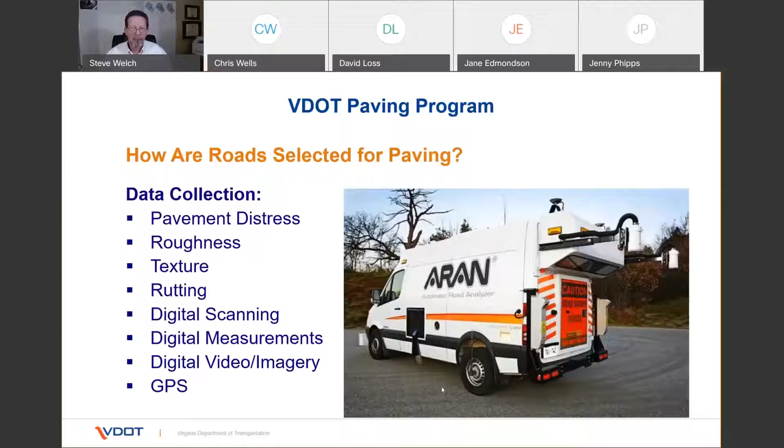Obviously, we have to address all the very poor ones first and the poor ones after that, and try to get to others beyond that as the budget allows. But we never let it get below 35 on interstates, and overall, we really won't let it get any farther than that.

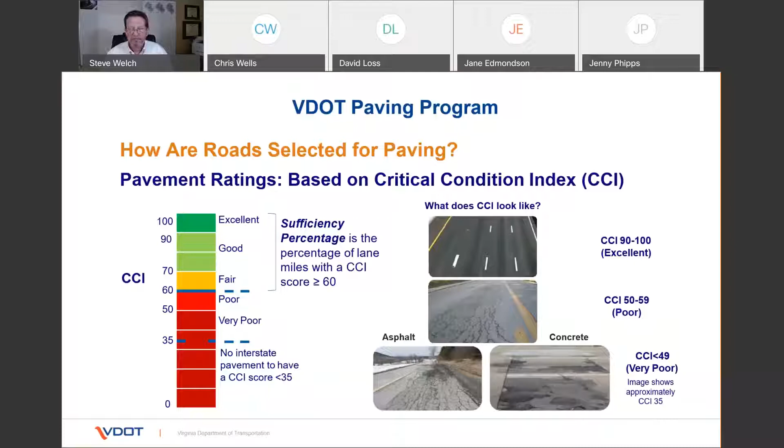So how often do we collect that data is another question we always get. We do this annually for the interstate and primaries. And beginning this year, we're going to be doing it annually for all the secondaries. Why is that important? In the past, we've only had the capacity, although still very good, to do 20% of the secondary roads every year. So in a 5-year period, we're gathering the data on 100% of the secondary roads, which consist of over 50% of all the roads in the county.

So another one is traffic volumes. We utilize traffic volumes to also figure out how to go about approaching which roadways are most important, in combination with the other things that we just talked about. So we also look at high volume interstate, primary and secondary routes with an AADT, or annual average daily traffic, greater than 3,500 vehicles.

And our goal is to make sure that 82% of that network, all the high volume interstate, primary and secondaries, maintain at least a CCI or rating index of greater than 60. And then we have low volume primary and low volume secondary roads that we set the goals of 75 and 60% for. And again, somewhat budget driven.

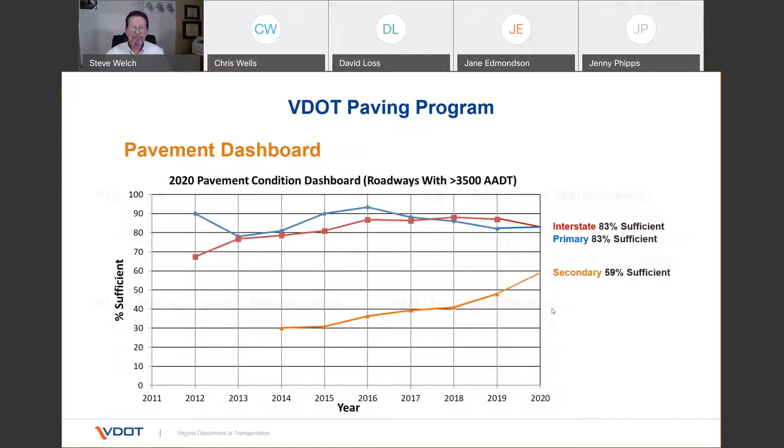So what types of pavement treatment do we do? We do have 3 types of preventative maintenance. One is slurry seal, albeit not the most popular, but as its name says, it's a sealant that's put on, and then it has a very fine stone that gets swept over top, that sticks to it, and it's brushed and sealed and brushed off to provide extension of the life of the pavement. We also do patching and crack seals as well.

But the main one that everybody sees is what we call plant mix or mill and overlay. So we mill a couple inches, sometimes up to 4, depending upon the condition, depth, other things. And then we overlay it and put back all the pavement markings and possibly sometimes change them, as Chris talked about earlier. And then on occasion, we do full depth reclamation or reconstruction, but that's only on rare occasions.

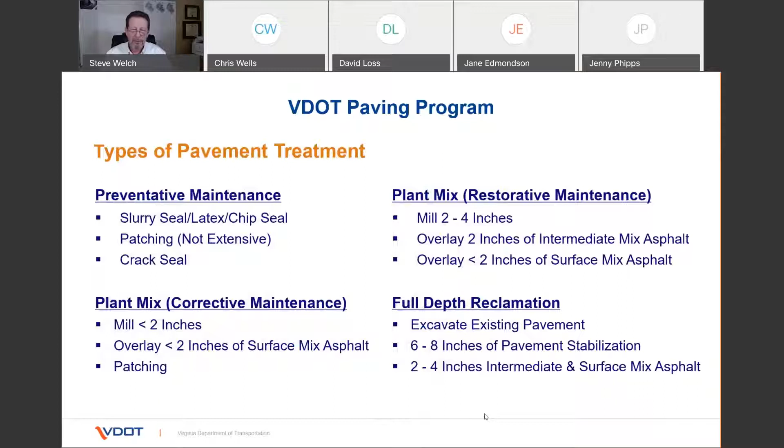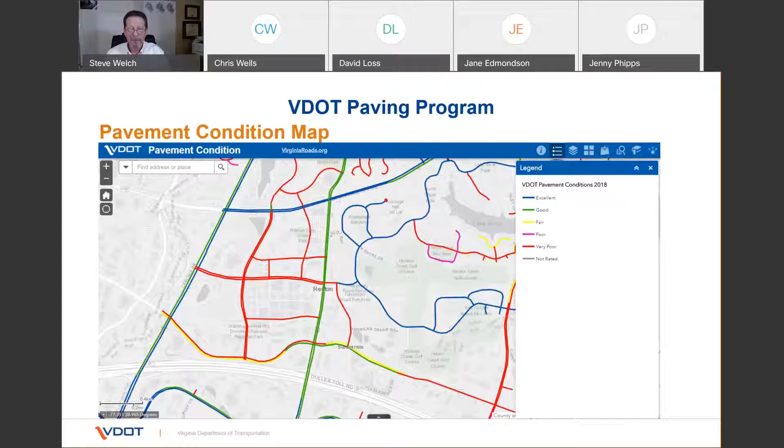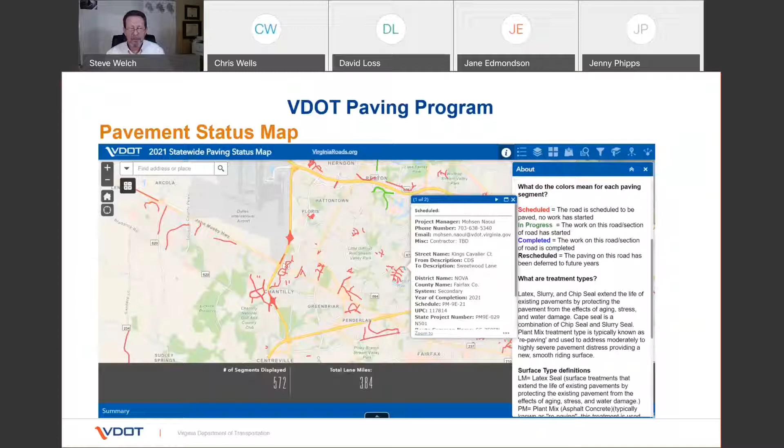And you can communicate with the project manager before the project gets started, when the project is occurring, and even after the project, if you have questions about your road that's getting repaved in some way or fashion. And again, that's an interactive map. You can zoom in, zoom out, go to different places, but it is an entire statewide map.

So each year when we develop our pavement plan, part of the work that we do, of course, is to eradicate the pavement markings off the roadway first. We put down sometimes some spray temporary markings, especially if it's a big project. And then our goal is generally to replace in kind with our contractors, but we do some adjustments where we might improve a crosswalk because it maybe wasn't lined up well, or add edge lines, or make some other improvements that we work out with the contractor during that off season of the wintertime as we're getting ready for the season.

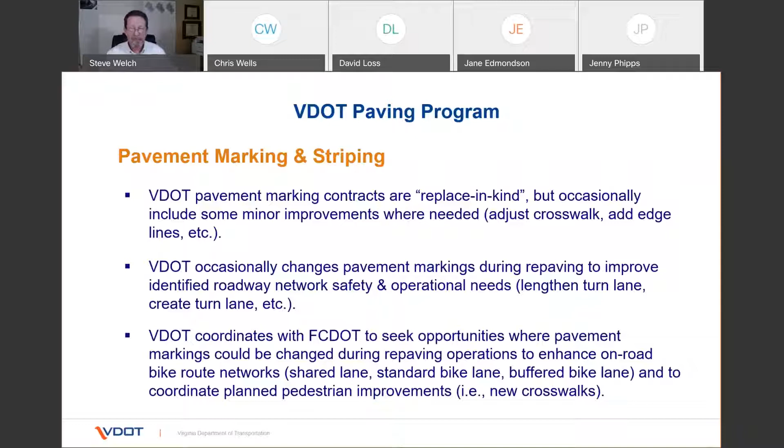And then lastly, in the last bullet, as Chris talked about and we'll be talking about here further, we work with Fairfax County together. The county has the comp plan for bike ped that Chris will talk about, and we work with them to figure out if there are locations where we can do shared lanes or standard bike lanes or buffered bike lanes and other pedestrian improvements. And then we'll adjust our contracts accordingly to marry up with what the county is looking to do as part of their bike ped program. So that's just kind of the big picture of it.

So if you ever have a question, you can call the number on the screen, 1-800-FOR-ROAD. Easier yet, you can go onto my.vdot.virginia.gov. A palette will come up where you can put a little information and your question in, and we have a ticketing system that captures it and sends it to the right person. It can really be about anything, but in particular, we're talking about the pavement tonight. Also, both the Pavement Condition Map and the 2021 Paving Map are now available on the virginiaroads.org website.

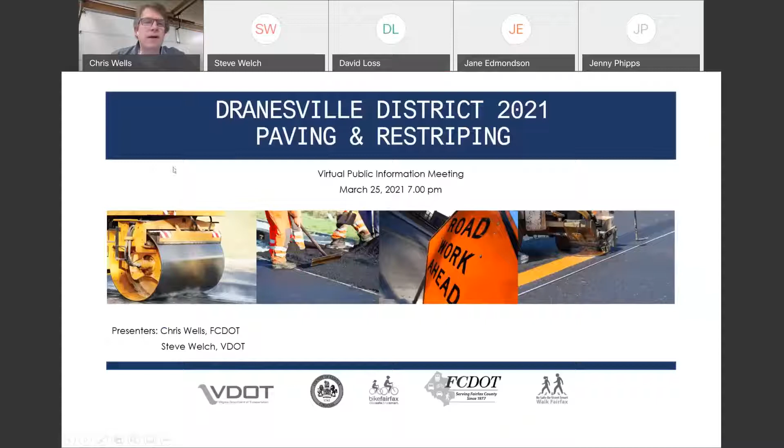There we go. Okay, so again, I'm from Fairfax County, Steve is from VDOT, and we work together on this. And what is our role at the county? Well, our role is to implement county policies and to work directly on behalf of the residents of the county. So as I explained, we look at the roads that are being paved, see if there are any roads that are excessively wide, whether it's a wide 2-lane road that could just have bike lanes, or a 4-lane road that doesn't really need to be a 4-lane road because it's carrying a lot less traffic than anticipated, and we can make those a 2-lane road.

So in Dranesville, we've been doing this for a few years, so there's actually not a lot of restriping proposals this year, but let me give you a little bit of the background. As I said at the beginning, the idea is to really improve the community, of course, by building a bicycle network, but also to give us those added benefits of reduction of excessive speeding, better organization to the striping if you have parallel parking, things like that. We originally started just focusing on the bicycle network. Our county has a bicycle master plan, but we soon realized that there was a holistic approach that really had other benefits.

The county's been doing this with VDOT for many years, so in some parts of the county, we're actually really starting to see a lot of connectivity of different networks. So when you combine our trails with these on-road bike facilities, you really are starting to see the benefits of a network. In these past 6 years, we've been able to do a couple hundred miles of bike lanes through this process. The most important thing, though, to me, and maybe to you as a taxpayer, is that this is about the most cost-effective thing we do.

My typical responsibility at the county is working in our capital project section, where we work to identify and fund and build trails and sidewalks. And the cost of those has really gone up over the 18 years that I've been doing this.

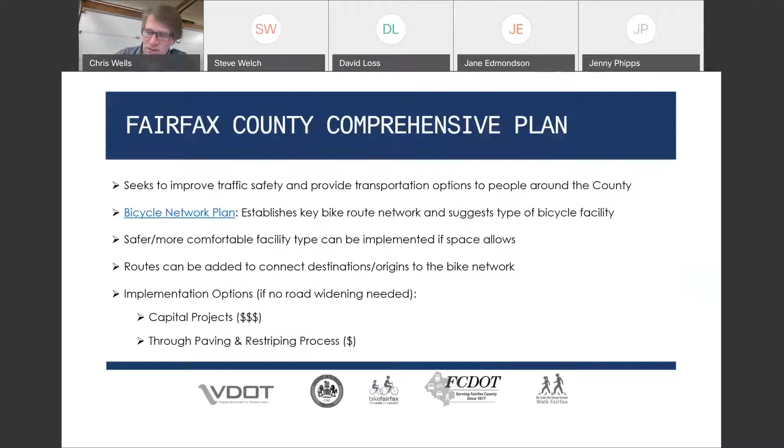They're in this paving business year round, and we have a very tight window between the fall and now, where we identify these roads, we meet with the board members, we're meeting with the public at this time, and these paving guys are coming in a month or two, and VDOT has to develop these striping plans and get everybody in line, and make sure everybody knows what's going on. So VDOT really does deserve a huge shout out for helping us with making our communities better.

So why are we interested in bicycling? Well, we know that there's been a focus on bicycles in the United States for 40 years or so that hasn't really worked, whereas other parts of the world focus more on off-road facilities. In the United States, we were typically just focusing on the type A cyclist, the bicycle commuter, who felt comfortable riding in traffic and riding with cars.

And so what you've seen for these past few decades in the Dranesville district on roads like Dranesville Road, for instance, we've been able to build roads and add roads where we have bicycle facilities on 4-lane divided roads. But a 4-lane divided road where cars are going 45, 50 miles an hour is not the place that I would feel comfortable riding, and certainly not the place that a family with children would feel comfortable riding.

So in America in the past few years, it's actually been a dynamic time of transition in bicycle best practices, where we realize we really need to build more off-road facilities along our major roads, but we still want to have these paving facilities that we're talking about tonight, because they're typically in quieter residential neighborhoods. They've got the space, they have these additional benefits, and they actually are comfortable and safe to ride. So again, it all forms a network.

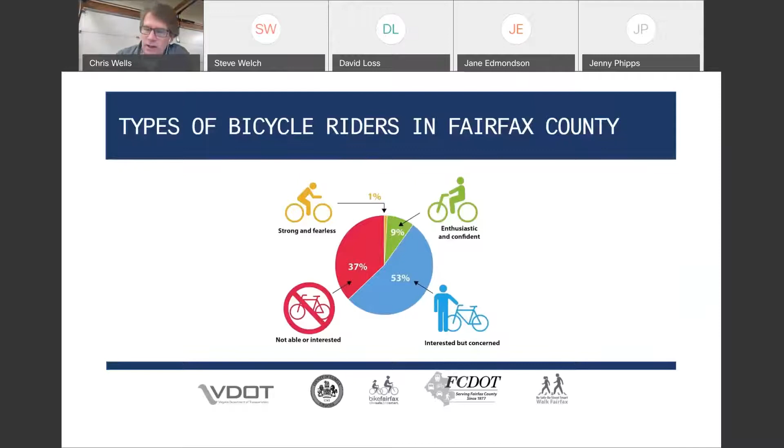And so we know that if folks can feel comfortable, if they have a facility to ride a bike on, and they can do their trip or their errand without polluting, that's got all kinds of health benefits, so on and so forth. So what are we talking about in these facilities?

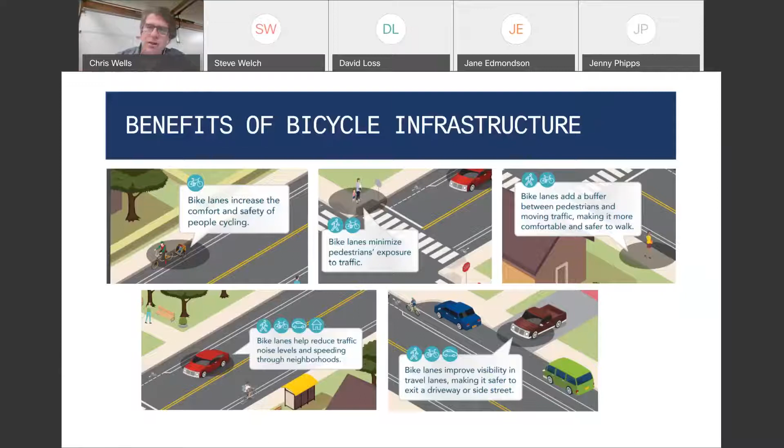Oops, how come my thing didn't go forward?

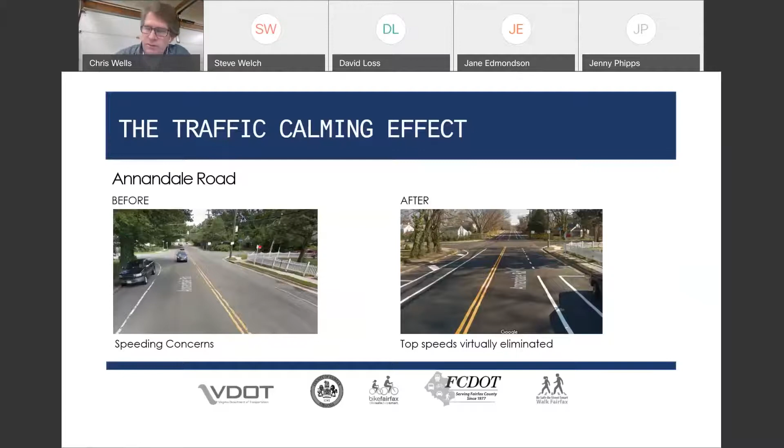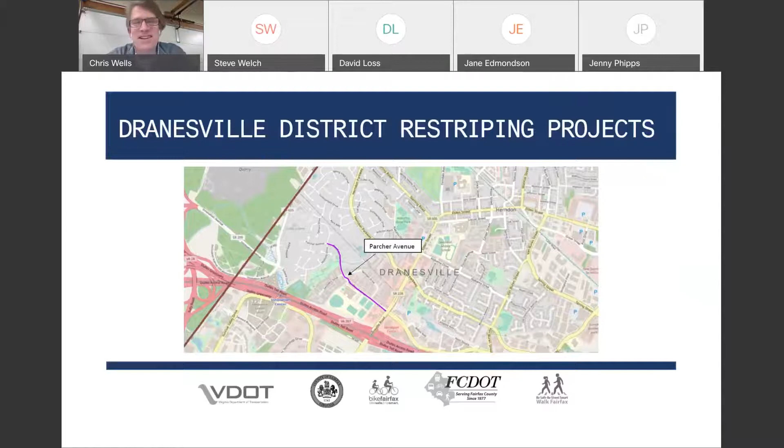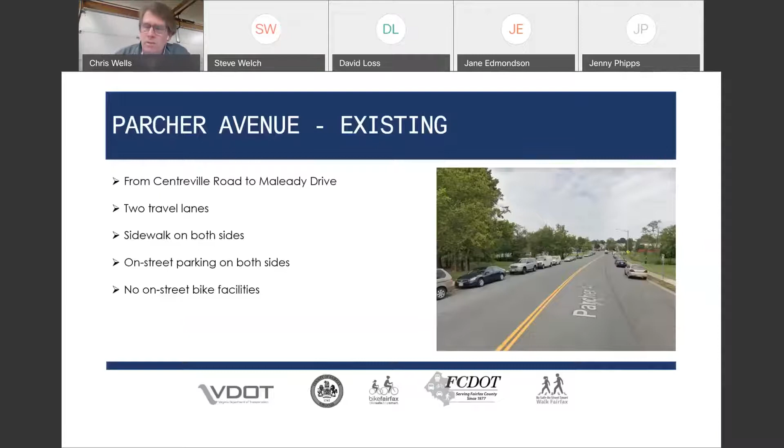The existing conditions are that it's 2 travel lanes. There are sidewalks on both sides. There's significant on-street parking on both sides, and there's currently no bicycle facilities. So the proposal would be what you see in this photograph. Again, from Centreville to Maleady, we would add the bike lanes, and then all the existing legal on-street parking will be maintained. I should mention on the issue of parking that that's a very important issue that we are sensitive to. Parking is very important on Parcher, obviously, because it's fairly fully parked, but it's important everywhere.

Parking serves important overflow parking needs for communities, guest parking. Certain HOAs have rules against tradesmen or even first responders parking. So even though some people view parking as a nuisance, parking is an important part of a community, and it's important for certain members of the community to be able to park their vehicles there. And without that, we wouldn't have the excellent diverse communities that we have.

So, however, when we do our bike lanes, we hardly ever propose taking parking except in areas where it maybe fronts some woods and there's just no one ever parking there. You know, we have on some roads proposed eliminating parking to introduce these bike lanes, but that is not what we're doing on Parcher. But when people ask me the question, will every parking space remain? The answer is no, because there's probably illegal parking going on there.

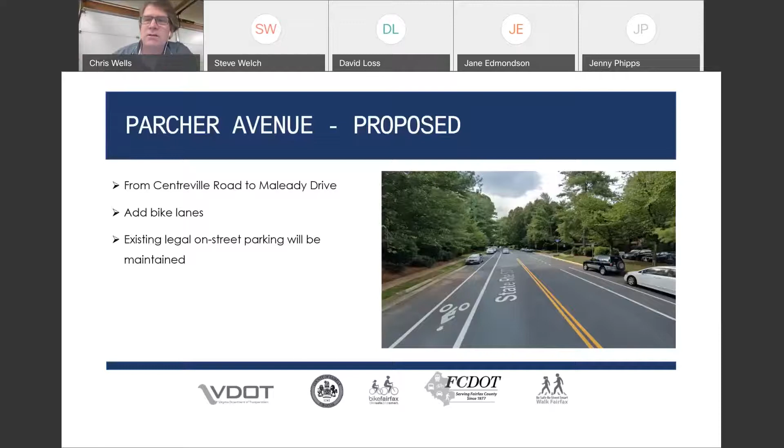And so on that length of Parcher from Centreville to Maleady, yes, there's no doubt that one or two or a few parking spaces where people are currently parking illegally will probably be striped out into legal parking spaces. But 99% of the parking capacity on Parcher will be maintained, and actually, in my opinion, improved by having the striping and the box outs of the ends and showing people where they should be parking. So the last thing I'll mention before we take questions is pedestrian safety.

My job in the county, well, it began a little bit before pedestrian safety. I've worked for the county for 23 years, but in 2002, the board created the pedestrian program, and it was, in all seriousness, in response to fatalities. And we unfortunately still have fatalities, and we still have that problem today. So a big part of what we're trying to accomplish in these past couple of years with this paving program, beyond the bicycle striping and the other neighborhood benefits, is we're looking for pedestrian safety opportunities.

Then what staff also does is we scan the roadways for opportunities where we might think it's a good place to add a crosswalk, such as a neighborhood generator like a park or a school. Now in Parcher, thanks to Supervisor Foust's office and the Dranesville Board of Supervisors office, we actually just added one of these concrete medians there at the elementary school. So if you're from the Parcher community, you've actually seen one of these.

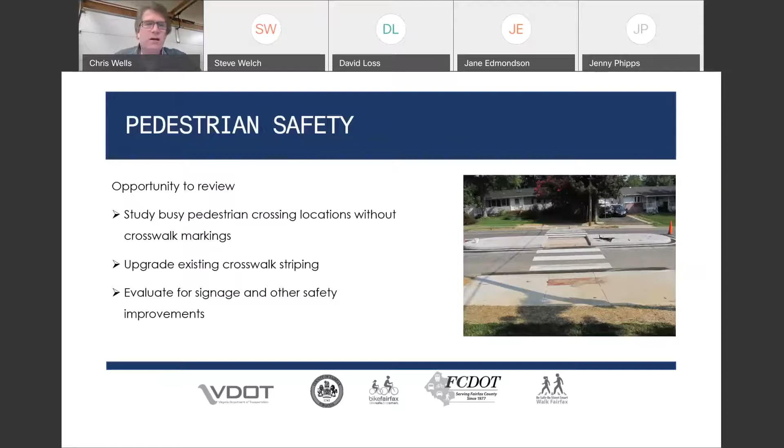So with that, I'll go ahead and end my presentation and go to the slides on how to contact us. So as I said, this is dynamic. If you do have comments, we would like them by April 8th. But if you don't make April 8th, we certainly want your input all year round.

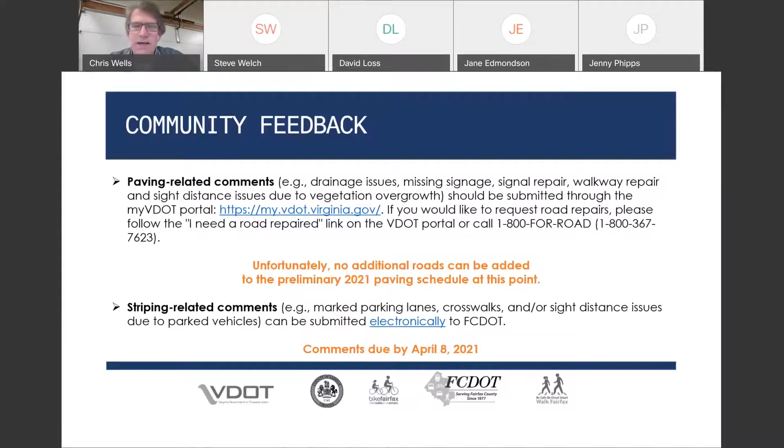For paving related comments, the best way to reach VDOT is really their excellent customer service portal. It's the address you see there in the middle in blue, my.vdot.virginia.gov, or their phone number, 1-800-FOR-ROAD, which is 367-7623. For us, this presentation will be live in a couple of days, and you can click on the word electronically, and that'll take you to a direct link.

If you want to email us directly, the email is activefairfax@fairfaxcounty.gov. And then you can also mail us comments or questions to our office, Fairfax County Department of Transportation, 4050 Legato Road, Fairfax, Virginia, 22033.

All right. Well, no questions so far, but we do have a comment. So Mr. Olson, thanks for the Hutchinson crosswalk. It has made a big difference. So great. That's the sort of feedback we are most happy to see. Now we do have a question. How wide will the bike lanes be?